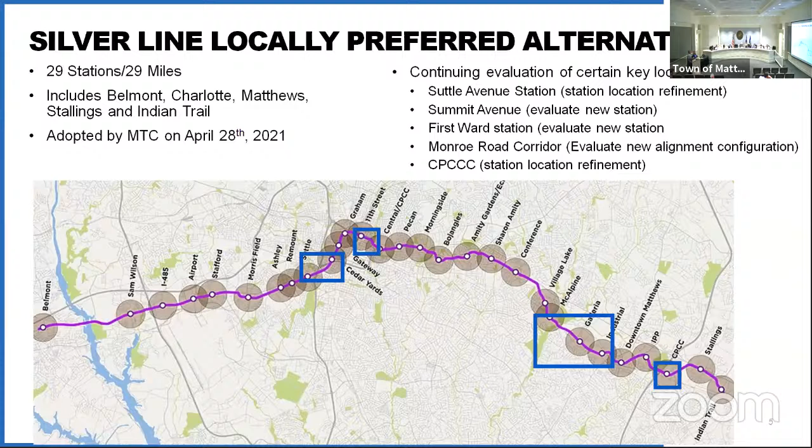So what is TOD? It definitely is about building light rail to get from one place to another, but it's also about building community. We just don't want to just engineer the project. We want to make sure that we build interesting places along the alignment, support neighborhoods that are already there, and also promote new growth where it can accept that growth.

So TOD is about, one, mobility and access. Of course, you've got the line itself, but it's also about how people can get to it if you're not riding the train, or if you're taking a bus, or if you're taking the streetcar, if you're riding a bicycle or walking. How do you make those critical connections to get to a station? And then how do you then weave that into the neighborhood around it?

Of course, land use is a very important component. Not all stations are going to be alike. If you look at the current Blue Line and BLE that runs up to UNC Charlotte, you'll see that everyone has a different character, if you will. If it's closer in, they tend to be more urban, more higher density. But as you get further out, they tend to be a little bit more lower scale, more suburban. And you might get some infill here and there, but again, with the towns now involved, we want to make sure that we look at your plans, make sure that we don't do anything to run afoul of those, and also to make sure that they kind of integrate with our TOD work.

And that leads into design. Again, what's that pedestrian realm? How does the streetscape blend in with light rail? And looking at building heights and density and those kind of things also are part of the design aspect.

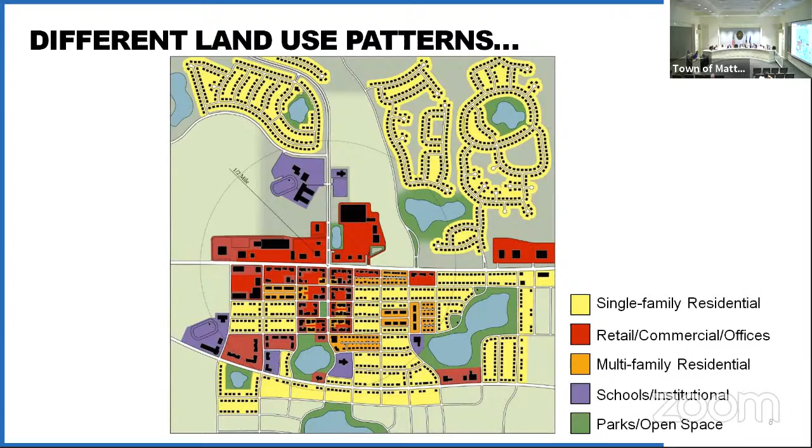And that's where the access piece comes into play a really important role. How do you create new connections where they make sense? But also, if you're building a new neighborhood, how do you set it up with the right kind of block structure, the right number of streets, the right mixture of uses? And that's where your land use plans and our goals kind of meet in the middle, so we don't do anything that's going to run afoul of your adopted plans.

This is essentially kind of our guiding light for how we look at that half-mile radius around the station. So that dotted line is a half mile from the centroid of the station, and this location is Remount Road in Charlotte. But the dashed lines around it is what we call a walk shed, and that's your half-mile walk shed, that's really all the connections that get you to the station that are existing. And as you can see in this graphic, what's grayed out, that's inside that hidden line circle, are places where we don't have any connections at all.

So as part of the planning work, we will look to see where we can have those other connections to get people to and from where we have gaps. And where we already have connections, how can we make those better, safer? If it's sidewalks without lighting, or sidewalks without a planting strip, bike lanes, how can we make that part of our planning work to make sure we get people, again, to and from these stations a little bit easier?

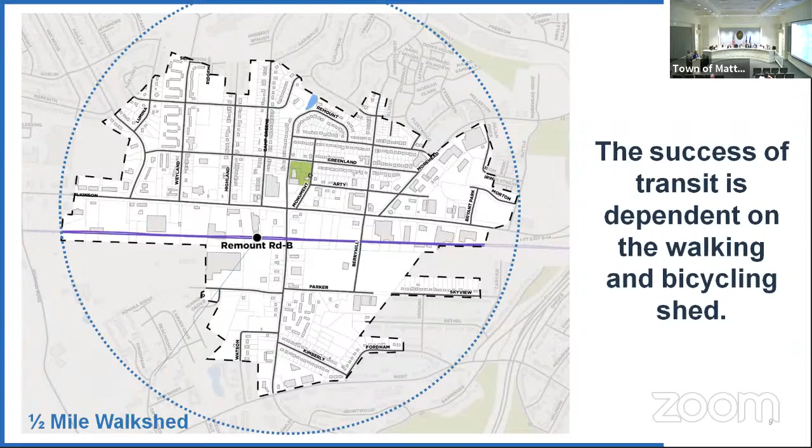Touching on where stations are related to their development, growth and maturity. Your more suburban stations, out near 485 or in more town locations, may have land use patterns that aren't quite filled in yet. You might have more industrial areas or areas that won't even accept residential, like the airport, where you can't have apartments and houses in the flight paths.

That might wind up looking like what you see on the left-hand side, more industrial parks, hotels, that kind of thing. On the right-hand side is South End, where prior to Blue Line and light rail it was really more of an industrial area. Over time that transitioned to what you see now, a very vibrant, mixed-use environment. Part of the study is looking at what we learned from the Blue Line and BLE that we can implement into the Silver Line today.

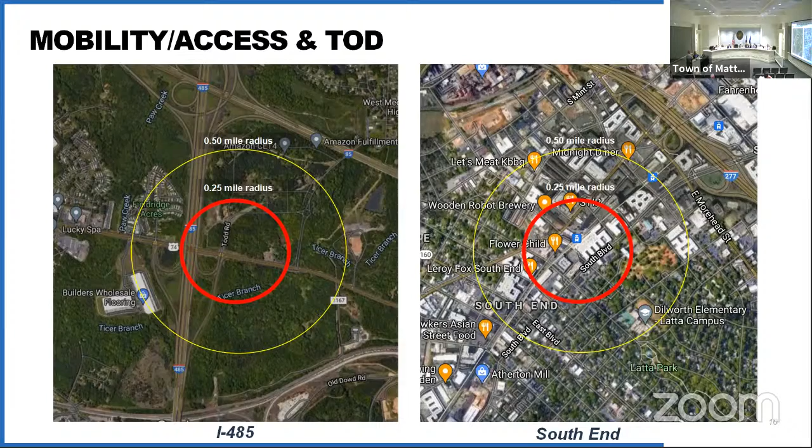Ideally you really want to have that mixture of uses, but not all will mature at the same point in time. Looking at Matthews, I want to work with you closely to figure out how much density makes sense, what kind of land uses make sense. Ideally you want a mix of uses, but that may not happen all at once on day one. That could take 5 years, 10 years, 20 years - it just depends on the market sometimes.

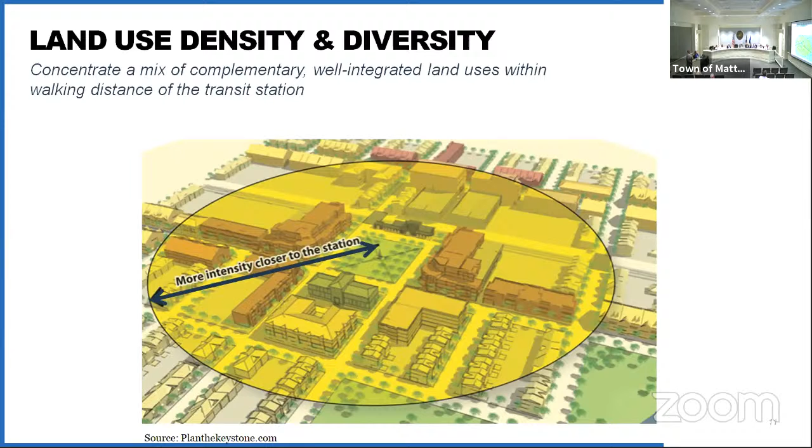These are some images of what we see on the ground now in terms of residential-based mixed use, where on the first level you might have traditional development like commercial storefronts on the bottom, then office uses or residences on top. That's what we see a lot on the Blue Line now - multifamily, 4-story type apartment buildings that are mostly mixed use in nature.

We also have some mixed use retail that doesn't have a residential component - ground floor retail or office with upper stories of some commercial use as well. I think the two slides you can relate to the most are on the right-hand side, upper right and bottom right, which is in Davidson - more of a town village scale, a 2-story building on a corner, maybe 3 stories, depending on what works for Matthews.

Another very important aspect of this work is looking at the public realm - that's from the street edge to the building frontage, and what are those components. We talk a lot about complete streets and interesting pedestrian areas. A well-furnished sidewalk with bicycle racks, plantings, receptacles and other street furnishings really makes that pedestrian realm much more active and interesting.

On-street parking helps to buffer traffic usually, and a wide sidewalk is very beneficial. Then you've got your building frontages with clear glass windows and storefronts - you all really do this very nicely in your downtown already.

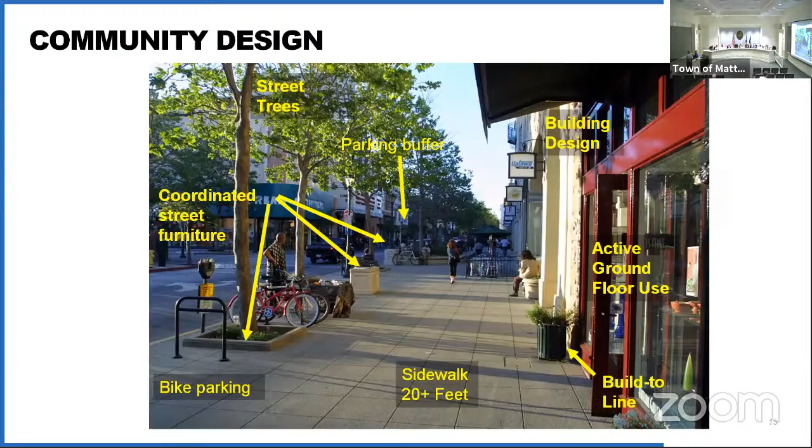I think I skipped one.

Even when it comes to parking decks and open spaces, we're elevating our design work, looking at what we maybe didn't do so well on the Blue Line Extension with parking decks, and what we could do better. We have open spaces around our stations now, and Park and Rec is on our team this time. Last time around we didn't have much intentional work with park and recreation and public spaces, but we'll make sure we have that in this project. Around our station areas we talk about affordable housing, but open space is a very important component as well.

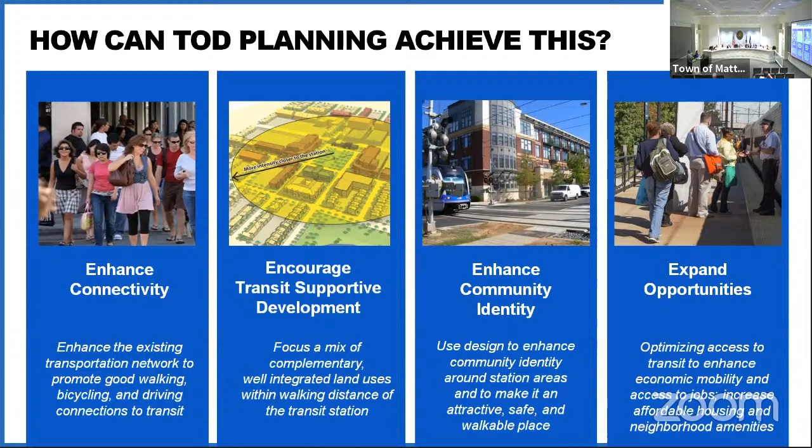Any questions so far before I jump into more of the TOD focused stuff? All right.

Lessons learned from the Blue Line and BLE: when they applied for the grant a few years ago, they took a good look at what could have been done better in this planning effort. One is being more inclusive in terms of who's on our management team. We already have Dana and her staff, Union County and Gaston County on our team, but also leveraging economic development, housing services to talk about affordable housing, the airport, CDOT, and the county and park and recreation. So it's expanding how we look at planning for the Silver Line from a staff level.

Some goals for the study: what kind of places do we want these to be? Every station will not be the same - they won't all be South End or North Davidson Arts District, but each will have its own characteristic. How do we make sure we have diversity but not a cookie cutter approach? Also looking at preservation - what kind of places should we be preserving along the corridor, not just saying everything has to be new and higher density. We want to add character by having places that make sense, whether landmarks or important places people like, making sure we keep those in place and not displace those uses.

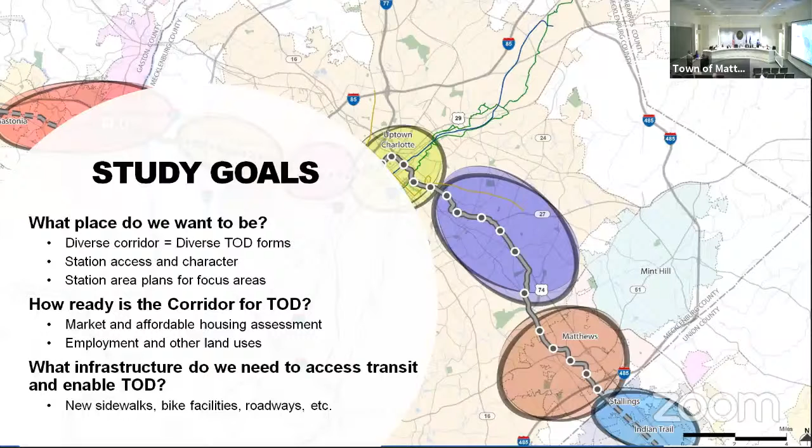This plan is a lot different. We want to really educate the public on TOD, which we didn't do a whole lot of early on. If you remember, we really did this planning work for Blue Line and BLE in a reactionary way, not this far in advance. We're years out from construction, but we want to get this information out earlier rather than after the fact, and that works hand in hand with the design team's work.

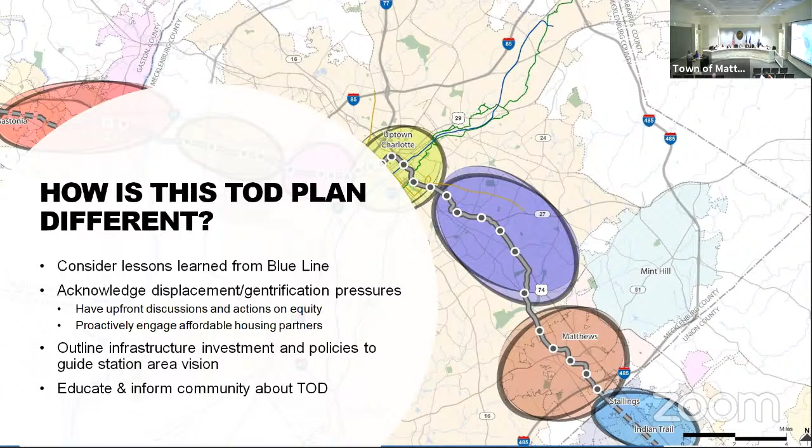Okay, I already did this one. Yes, there we go. Thank you.

So some work completed so far. We have completed the existing conditions report, and that has market readiness information in it. It's got the walk sheds I talked about earlier, some high level information about the stations, and the planning efforts you all have done. All that is part of our existing conditions report. It's still somewhat of a draft because we're still working with the design team on station alternatives, but it's a baseline of information for us to work from.

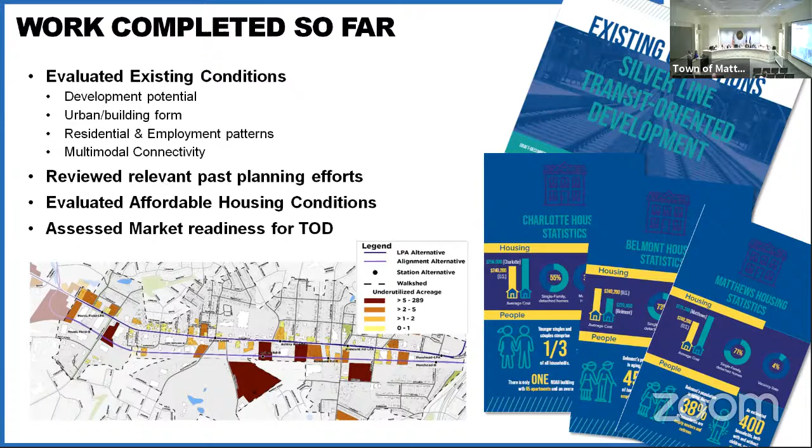So we're going to one plan for each station area, and we're going to do a deep dive into 7 of those station areas. We have 4 in the Matthews area, but as far as a detailed analysis, that will be done in 2 stations, downtown and entertainment district in Matthews, also 4 in Charlotte, and 1 in the city of Belmont. Those will be a little bit more intensive, more graphics, more details about housing, maybe some potential numbers looking at publicly owned land, and a much more rigorous analysis of what that station could look like.

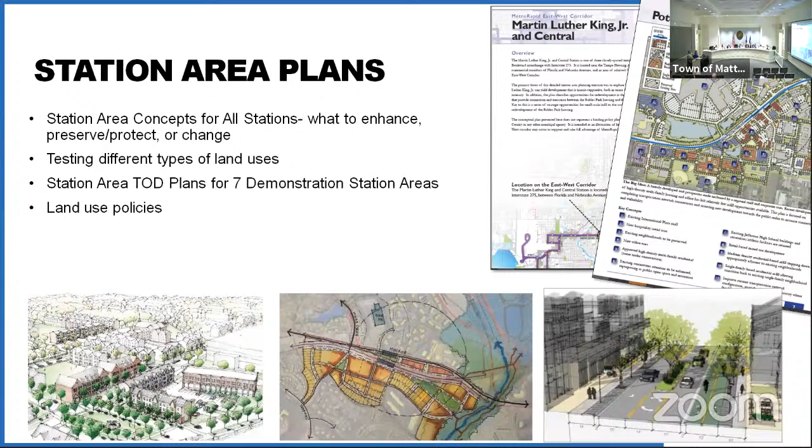And again, the other component of our plan is to do an infrastructure plan, not a cost analysis per se, but more of a high level look at the major connections we've got to make the station really work. And then maybe here's some secondary locations, but can we identify those critical connection points.